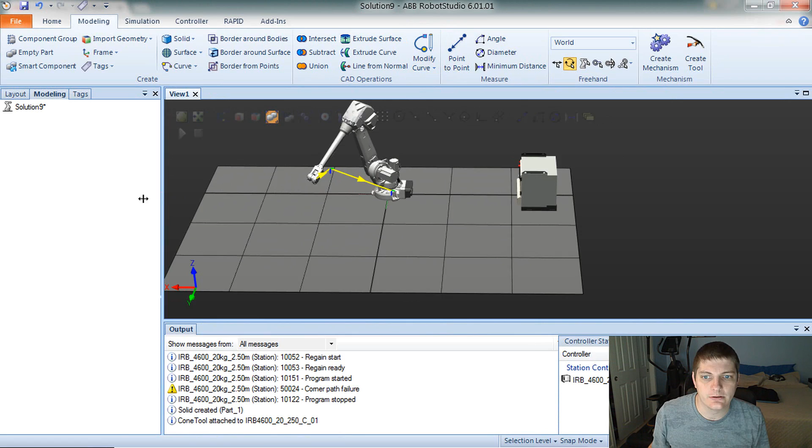That blue is awful. So what we learned in the last video is how to tell the difference between a joint move and a linear move and why we might want to do those. Linear going right along the path between these points, and joint being more loose and not constraining the robot's path quite as much, but you gain a lot of speed that way. So that's about it. If you want to go back, check those out.

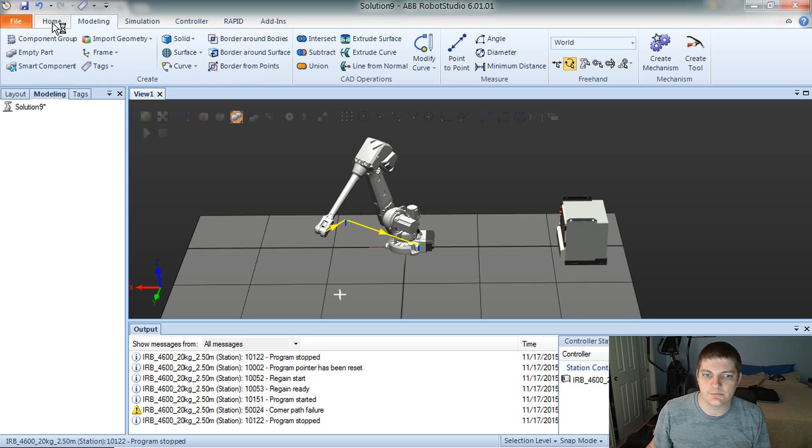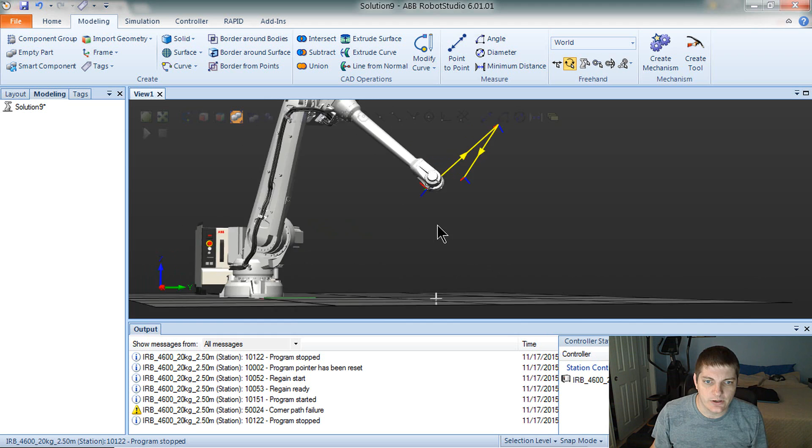So what we've done now is basically make a very expensive robot just wave around in space and do nothing because it doesn't really have a tool on it. Normally you would have a welder, or a spindle with a mill, end mill or something in it, or a sanding system, or a grinder, or some sort of fixturing gripper, something like that. But we don't have that, and I'm not going to code one up just for the series. We're going to just teach the concepts with some sort of simple tool.

So I'm going to go ahead and build one of those. Alright, so let's go over to the modeling tab. This is all within the station. So we need to make a new part for our tool. I'm not a huge fan of this modeling stuff here. I'm used to systems that are more made for modeling.

This will get you by in a pinch or for a simulation, but you should really use something that was made for this. But what I'm going to use is actually, instead of a cone, I'm going to use, just so you will be able to tell the rotation a little better, we'll do a pyramid.

This base center point, you need to be careful in this program because it's very involved with the origin of this geometry that you create. And so when you go to attach geometry to other geometry and make it move around and stuff, that origin point, the reference point for that part is very important. That's the attachment point.

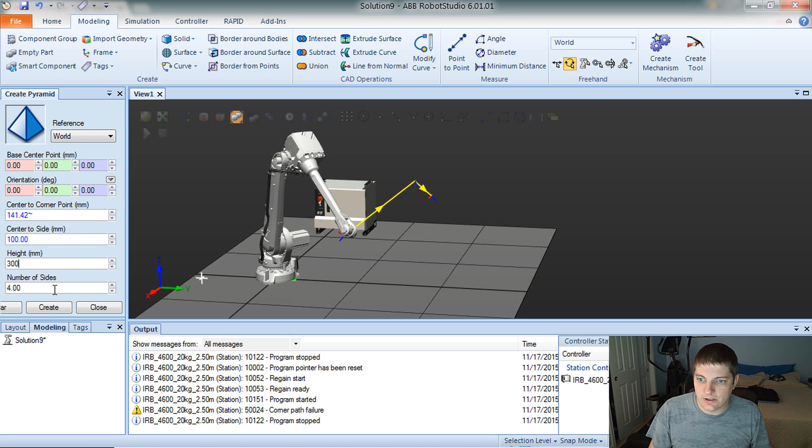Create. So there it is, you can see it down in there. See, he's kind of big, but that's fine. He should work fine. So I'm going to close this.

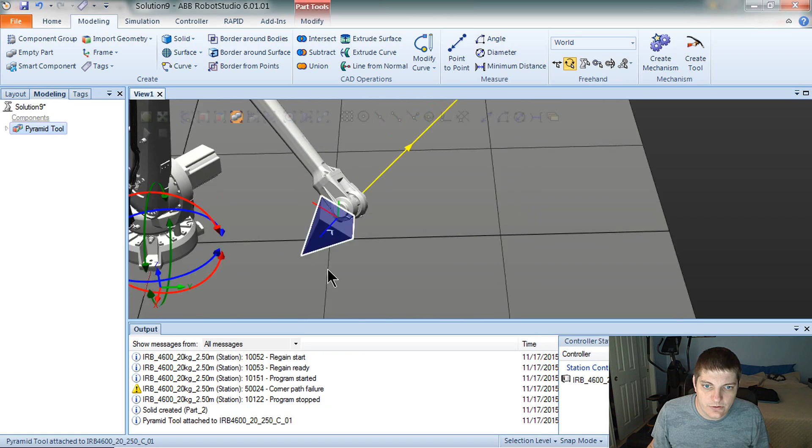I don't want to make an extra one. I'm going to rename him Pyramid Tool, something like that. And then right-click him, attach to the robot.

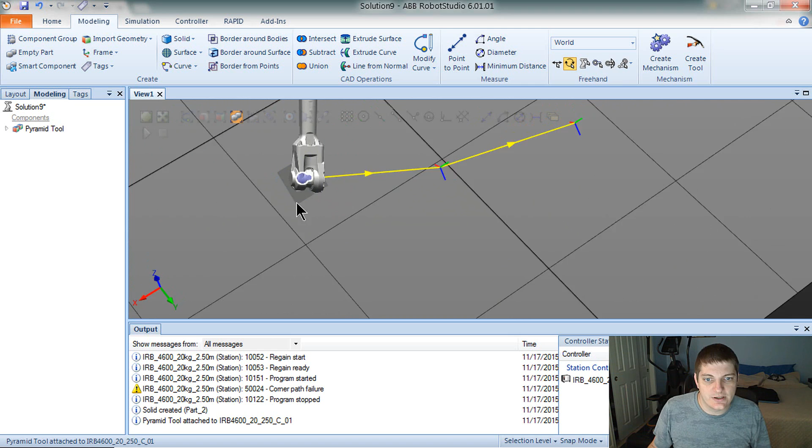And what it should do is it's asking me, do I want to update the position? If I say no, he's going to be attached to the robot, but he's going to be sitting right here at the base of the robot. So it's going to assume there's some wacky geometry that somehow connects it up, and there's not, clearly. So we want to update that, and now I have this attached to the end of my robot.

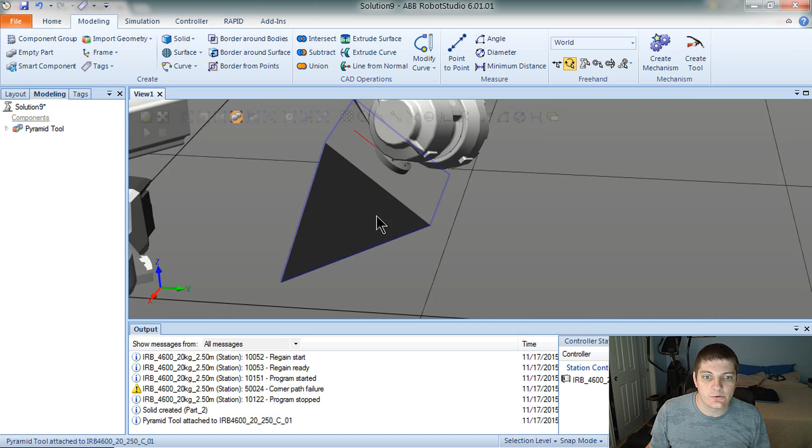So what I can actually do, so this, it's worth noting here too that this coordinate system that's showing, that's on the flange of the robot, is oriented with the joint position of that. So we know that pointing out of here is 0, or it could be all the way around and be 360, but either way, it's set up for that.

And so that's why it matches the coordinate system of this one, which is also perpendicular to these sides here. So that's why it lined it up just perfectly. And so that helps us out a lot. And you'll find with most tools and end effectors, you need to get that figured out.

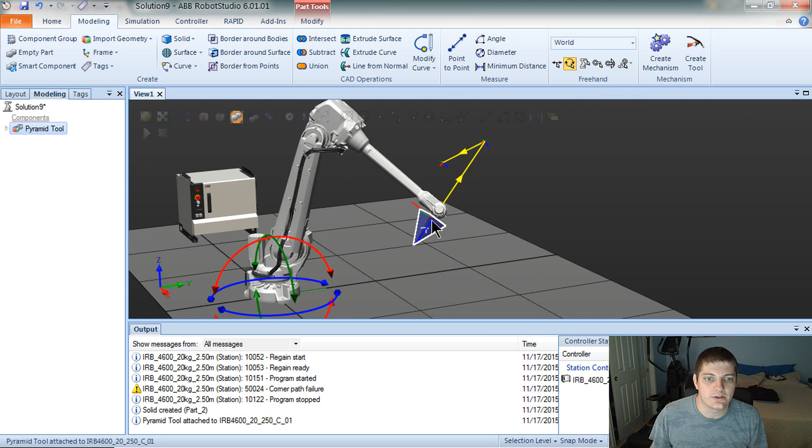And keep in mind your tool's orientation to the flange, what the zero point is. They'll often put a dowel pin or something in there, and it helps make sure that you can get your tool oriented properly here in simulation versus the real world. So just make sure you pay a little bit of attention to that if you are planning to move to real hardware after that.

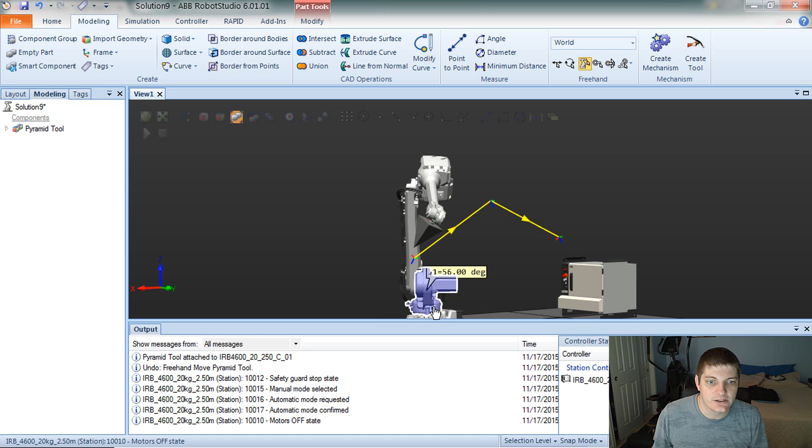So here's our part, and now we don't really have the ability to move the tip of our tool with respect to these points. So we can't tell the robot, like, we could come and teach points by looking if we wanted. Like if we wanted to move this guy, come on robot, come with me here. Let's see, let's just move him here, like here for now.

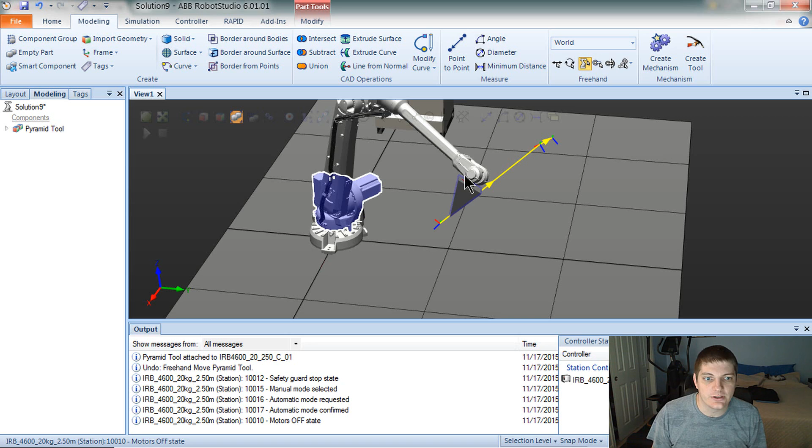If I want to move this guy, now I've got my tool attached, but I can't exactly tell him, hey, put this right on this point. That would not be very precise or accurate or anything. So we don't want to just position there.

So what we need is for the robot to understand the direction and this point with respect to its flange, so that it can then tell what this point is with respect to the world coordinate system. So let's do that. I'll create some tool data for this.

So you can usually have as many tools, or some amount of tools. I think Fanuc is 10 is the default setting, I believe. And this guy, I think you can have as many as you want, basically. But this concept of creating a tool frame is pretty universal.

All right, so we need to create some tool data. If we go back to this Home tab here, we can go to the Other tab and then Create Tool Data. Make it bigger so you can see it. Tool data, we will call pyramid tool data.

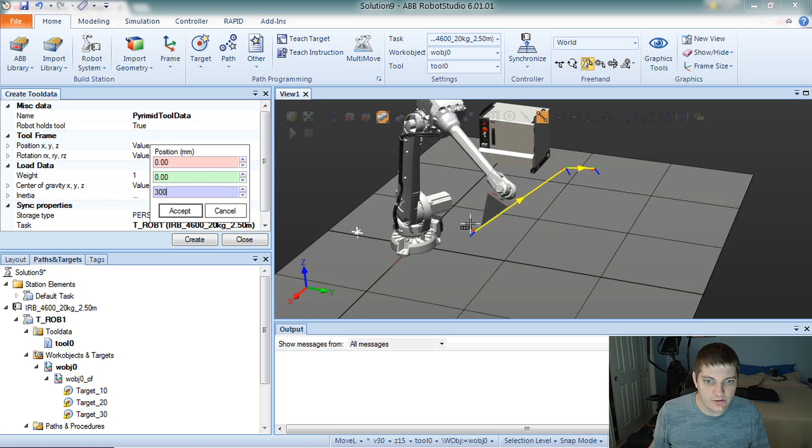And robot holds tool - you can have a tool that the robot does not hold if it's on a rotary axis or another robot's holding it, two working together on it, things like that. So position XYZ - this is the offset, I guess, from this flange, a way to put that.

So in this case, from that flange that we mounted this to, I put in 300 for this value to the tip. So I'm going to do that in Z, because if you look back at our flange, you can see here's the X marker and then the Y marker. So Z is clearly pointing out of the flange, and we can actually do that.

Let's see if I can - oh, I can just click this right here as well, which is nice. 0, 0, 300. So that works. I'll make this transparent here in a minute to make things easier.

Rotation - so if you wanted to actually rotate about this, say this pyramid was actually mounted in some funky way and sticking off this area over here, we would want to put a rotation about any of our roll, pitch, and yaw, or if you want to do quaternions. But if you just do roll, pitch, and yaw, it works fine.

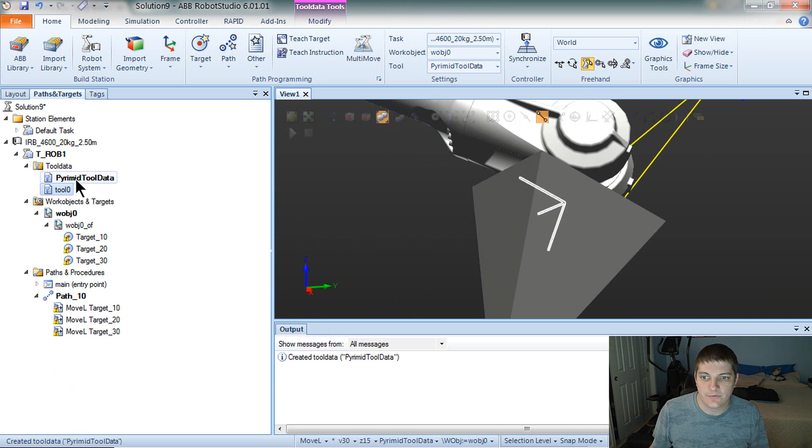So load data, of course, that's going to be how heavy it is. So the robot actually will change its dynamics and change its collision detection and things like that with respect to the center of gravity, the inertia, and the weight. But since we're all in simulation, we don't need to worry about that. But you will want to do that on a real robot.

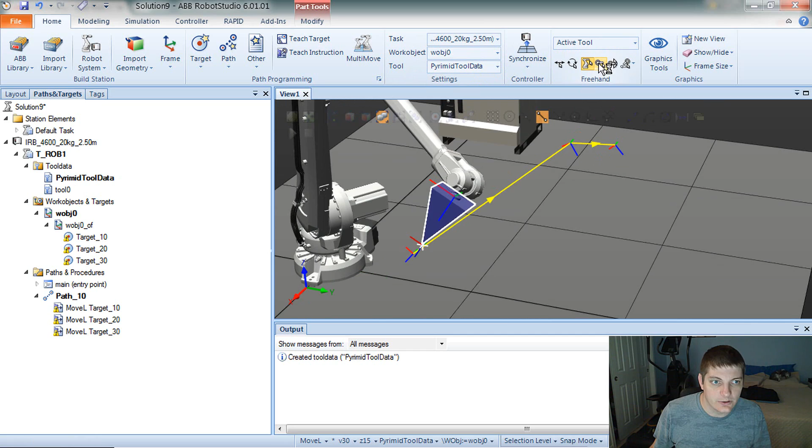Storage type persistent, meaning it stays with the controller. And what task is fine, module name is fine. So let's create that, and now we've got a new crosshair here. So that crosshair is now actually our tool data. You can see over here, tool 0 was our flange, which is the default basic tool.

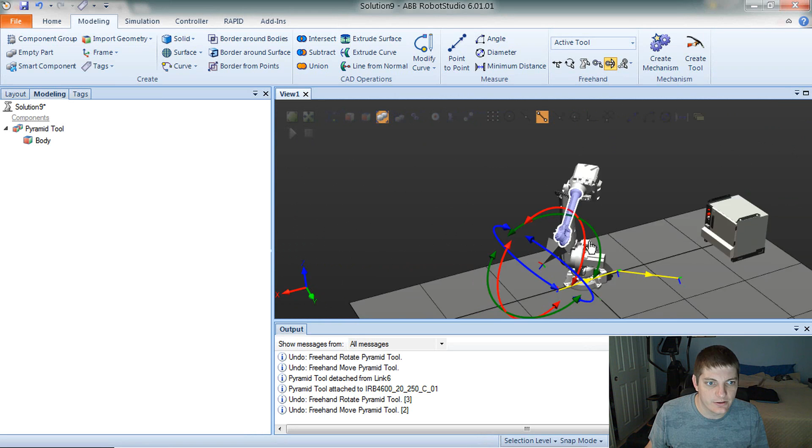And then we have the actual pyramid tool here, a whole other set. So what I can do here is say I want to move this robot with respect to the active tool. That lets me pick the tool here - it's saying tool 0, tool 1 selected. So I can now jog about that axis. Clicking on the robot is the key there.

So I can now rotate the robot about this point, and you can see - whoops, a little carried away there - it's actually solving the kinematics for the robot to put those positions there.

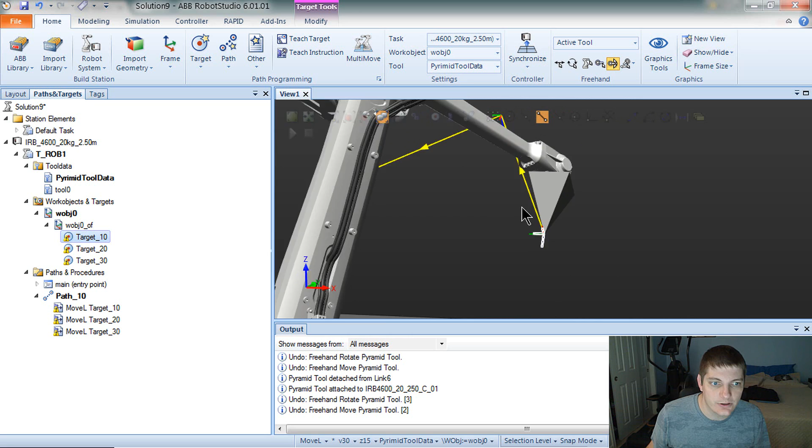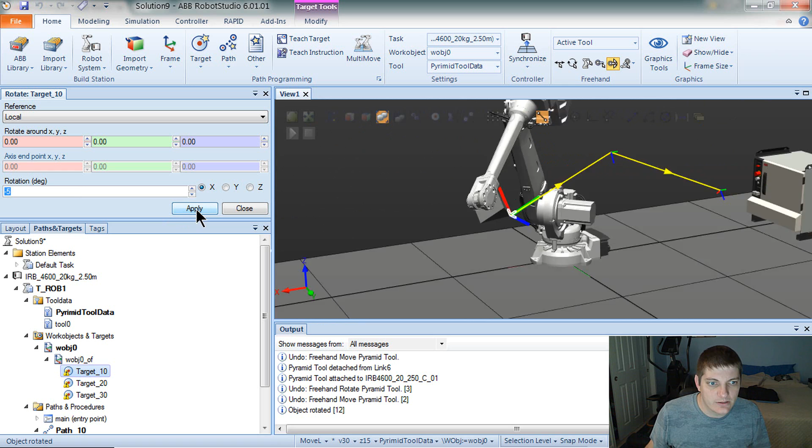So now if I go back to my Home tab, with this pyramid tool data selected as my active tool, go back to my targets, click 1, right click, view robot at target - you can see that now instead of putting the flange at this point like a few videos back, it's actually put the tool right there. And if this was a welder and there was some magical part here, we'd have a problem.

So we could just come in here, rotate this around local - let's see, that's going to be about the x-axis. So I'll go 5 degrees, oops, -5 a few times, and we can position this tool however we want.

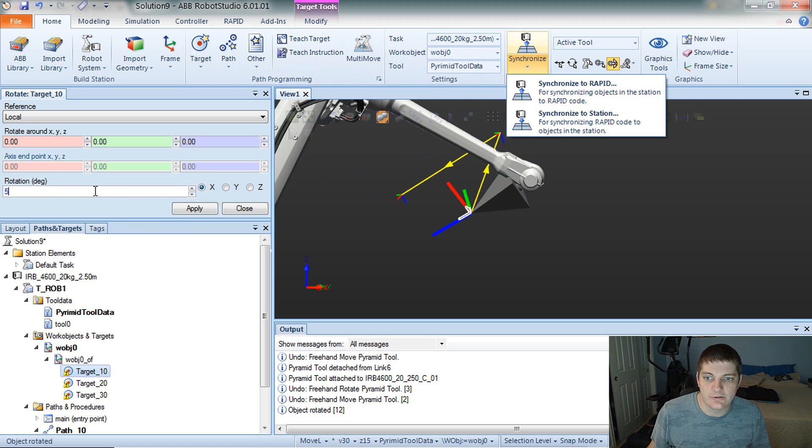Now I just crashed the robot into its own tool - I shouldn't have made this so big, but that's something valid to watch out for: collisions, because the simulation will happily let you do that. It does have some detection stuff built in that I haven't set up, but keep in mind you got to be real careful, because the robot will happily try to go there even though it knows the geometry.

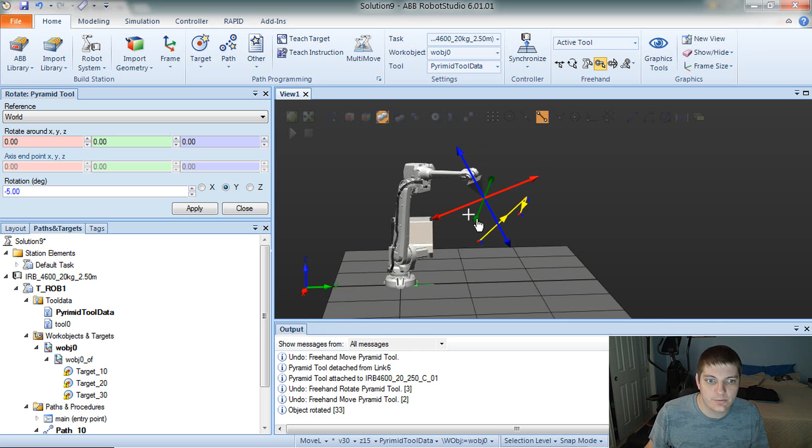It knows the tool. Once I sync this over to RAPID, now that I've changed this point, it doesn't really know it any different - it's not part of the things we sync.

So this is about the x-axis, so I maybe need to work on my y-axis a little bit, maybe -5 degrees, and position them how I want.

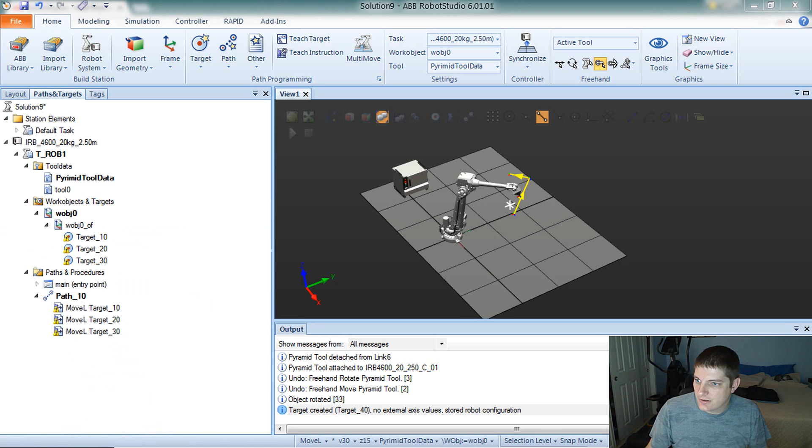Alternatively, say I want a whole new point here - I'll come up and make one up here, for instance. I've now moved the active tool up some, and I can come over here and say teach target, and teach target will create target 40. So I just made a new target, and I can bounce the robot around between these targets.

So if I want to add him to my path, I could easily do that - I'm not going to bother with it, it's pretty straightforward stuff. That's similar to how you would do it if you're holding the teach pendant, jogging the robot - you would go in and say I want to modify this point, or create a new point, using these coordinates.

So that's about it, what I wanted to cover on tool frames. It's very important for the robot to understand what the tool is, how it faces, how it's oriented - especially for you in simulation to make sure you orient it right. And if it's a spindle, that extra degree of freedom in the twisty motion of the spinning spindle is kind of annoying. It won't automatically solve that for you, but you can use that extra degree of freedom to put the wrist right where you want it for nice linear moves.

We'll get into a little more tweaking later on in the next video.